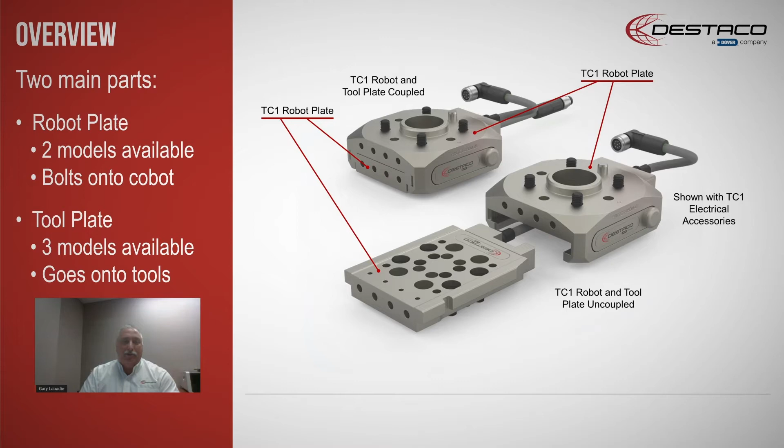So we came up with a tool changer, which basically consists of a robot plate and a tool plate. The robot plate is what bolts right onto your cobot, and the tool plate goes onto the tools. In listening to our customers, they asked us to create a plug and produce product, and that's exactly what we did.

The robot plate of the TC1 bolts directly onto your cobot arm. It's different from what others are offering in that it has the ISO 9409 mounting pattern. That means the user has no need to make an adapter plate. As a matter of fact, he doesn't need to look for bolts or hardware to mount the product, because we provide an integration kit with the product. So it's about 2 minutes to install the robot plate to your cobot arm.

Now on the tool plate side, your tools might have already been bolted directly to the cobot. So how do I make that work with the tool plate? Well, it turns out that the tool plate has the exact same mounting pattern, and we provide an integration kit for that. You can install your tools directly onto the tool plate, and then with a simple slide in and click, you'll lock and couple the tool changer together with your tools onto the cobot. So it's a very fast integration.

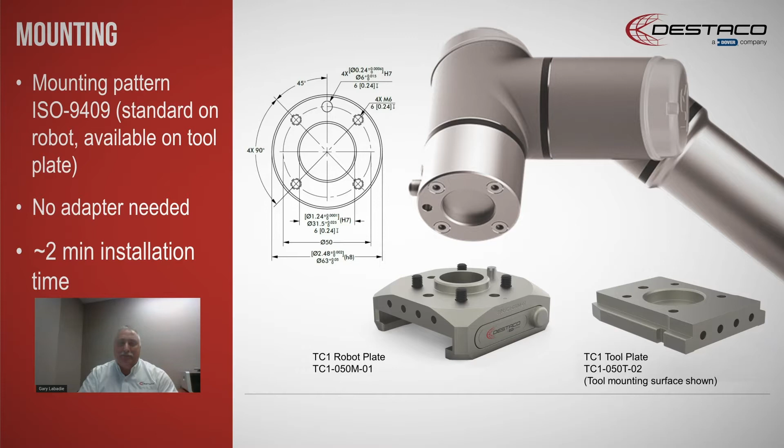The fact that we didn't ask you to create adapter plates means you've lowered your costs and increased your speed of integration. Adapter plates are what you find on a lot of other offerings in the market. Those are hidden costs that we want to remove from the user and make it a truly plug and produce product. So let's talk about some of the features of the tool changer.

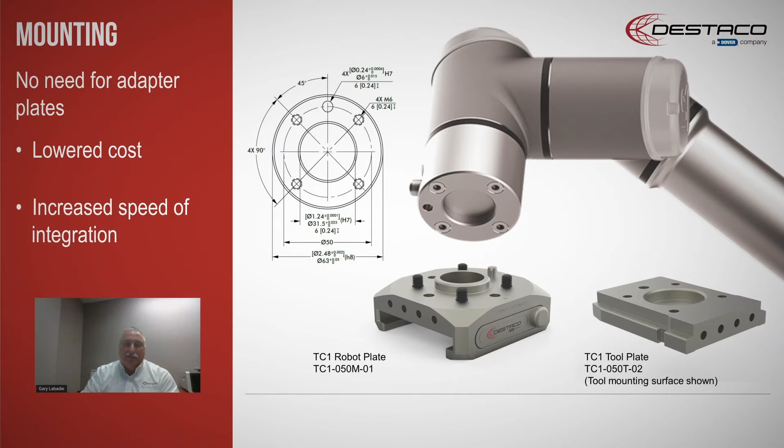First thing you notice about it is it's a very low profile product. It is 25 millimeters in height. That low profile will reduce any offsets in cobot programming required for longer tools that are added. Second, it's very lightweight. Cobots have a very low payload capacity, so the lighter the tool changer, the more payload capacity is applied to your physical tools that you need to use.

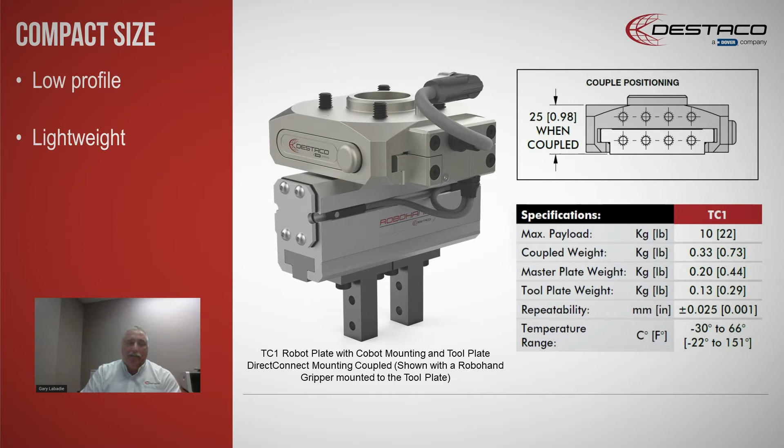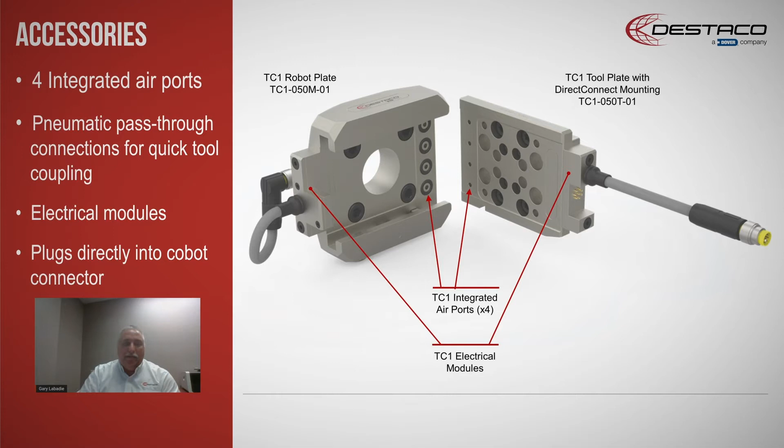Additionally, if we look at the features within the TC1 itself, the tool changer automatically comes with 4 integrated air ports. So if you're using a pneumatic application, the air lines are already there. Should you require electrical, we have electrical modules that plug directly into the cobot connector that's on the arm. That could be a Techman robot, a UR robot, or other robots—just need to check out the pinout compatibility. But the advantage is we do not require custom cabling or custom adapters. Again, that's added cost that shouldn't be necessary, and we solve that solution with the TC1.

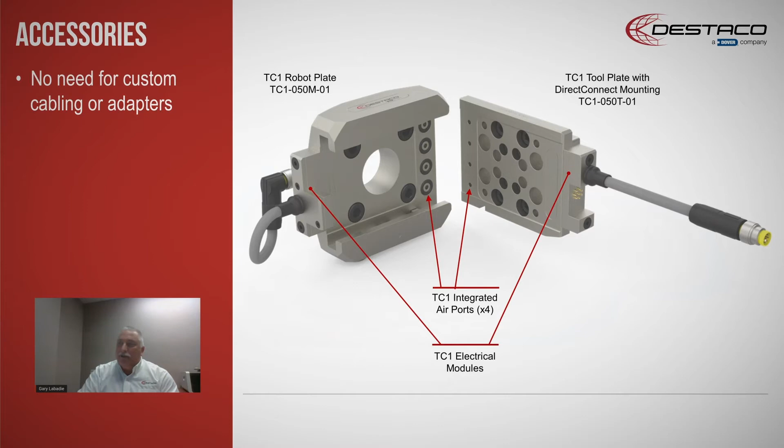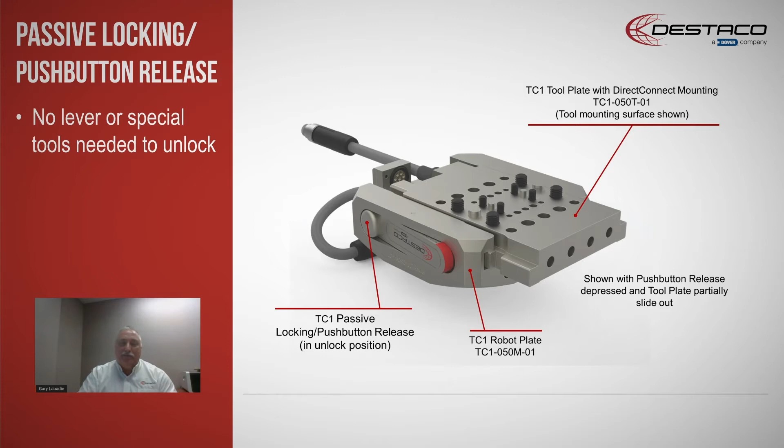So overall, you have a very simple self-locking mechanism. It's made to work for any operator. It's a low insertion force, simple push button locking or unlocking. Because it's just a simple push button, there's no lever that needs to be opened up, no tools necessary to unlock it, and nothing that gets in the way of other utilities, which is common with other solutions out there. So it's all inclusive. When you buy a TC1, you get everything you need to integrate it.

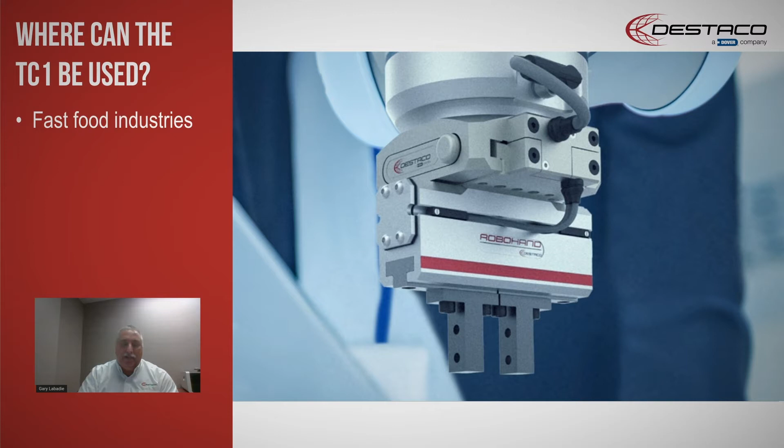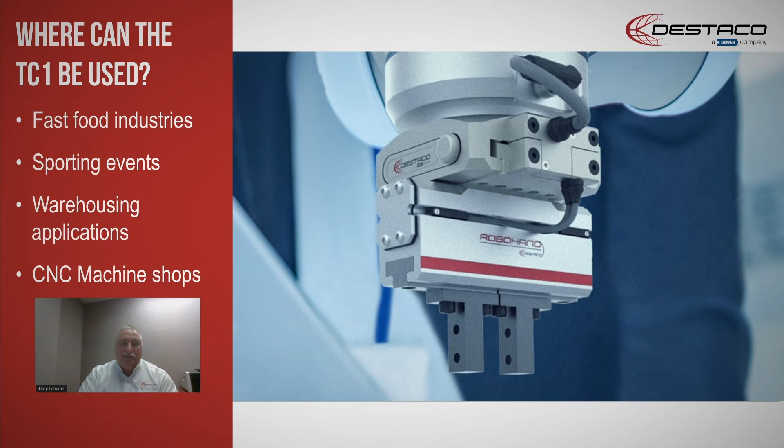And where are these applications that may be non-traditional automation? If we think about it, they're showing up in the fast food industries, at sporting events, in warehousing applications, and in small CNC machine shops that are trying to address labor shortages, safety issues, or integrating and automating their processes for better cost control.

So overall, the TC1 offers you a very cost-effective, flexible solution. It is a plug-and-produce product. It's the easiest tool changer to use on the market. It is customizable. I probably didn't cover that, but should you not have the mounting pattern, is not ISO 9409, the robot plate is fully customizable for the end user to put their own mounting pattern in it. That's one of the unique features this product offers. No other vendor supplies that, and the same is true on the tool side.

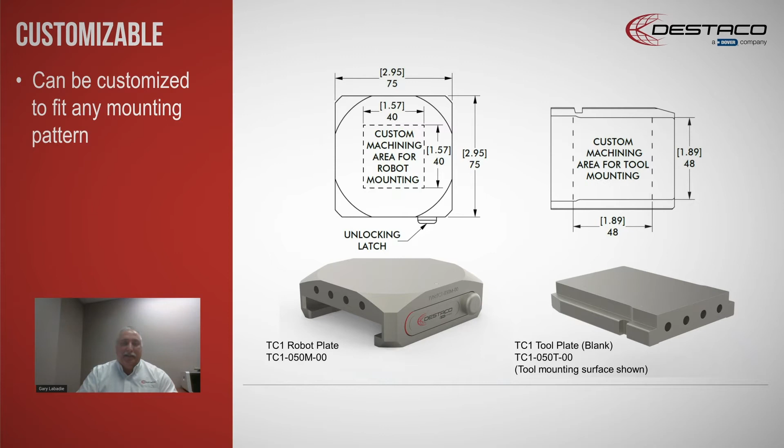So if you have to have custom mounting, you can either use a standard ISO 9409 robot plate to bolt to your cobot, and then a custom mounting pattern to your tools. It's very flexible in that area. And whether you do that or Destaco does it, it's your choice.

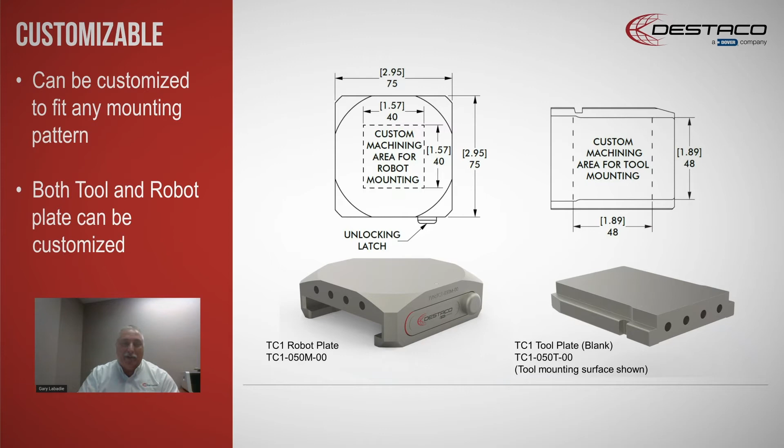Our goal is to give you easy to use tools, easy to install, and everything can be done in less than 10 minutes: 2 minutes for a module, 3 minutes for mounting the tools, and 3 minutes to mount it to the cobot.

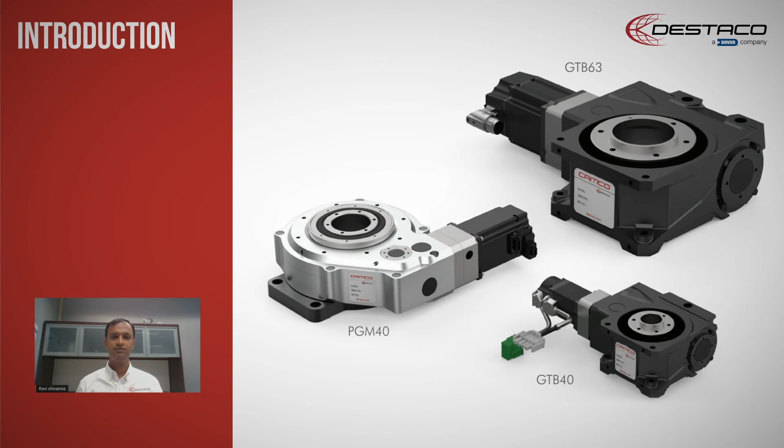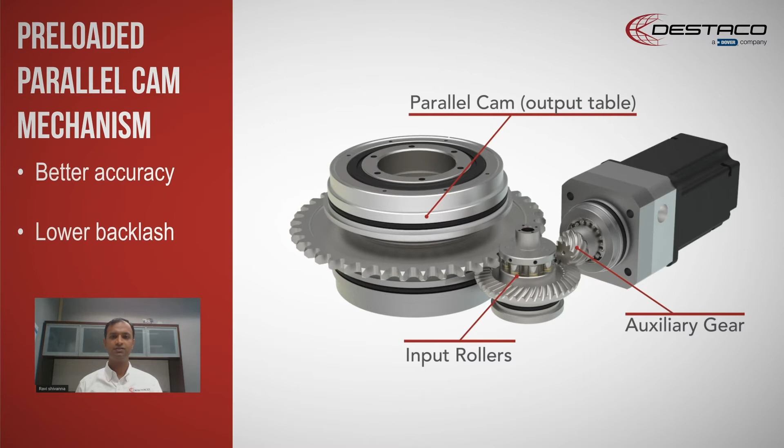Hi, my name is Ravi Shivanna, Global Engineering Manager for Destaco Camco products. Camco offers a wide variety of servo positioners. Today I am here to introduce PGM40, one of our new products within our Camco servo indexers family. PGM40 is a servo reducer with a preloaded parallel cam mechanism inside, giving better accuracy and lower backlash, suiting various precision or accurate servo indexing applications.

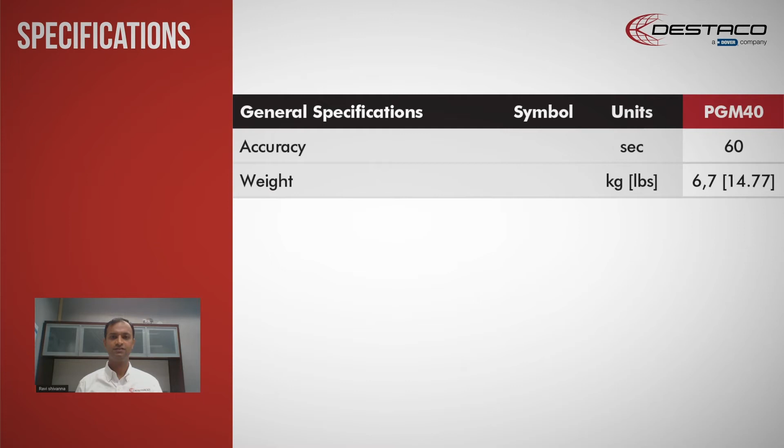This product has an accuracy of 60 seconds. It is light in weight, 6.7 kilograms, and its performance offers ease of use for a wide range of applications. This product has a mean output speed of 100 revolutions per minute and is able to deliver start or stop torque of 63.9 Newton meters. This product has an axial load of 1415 Newtons and a radial load of 2172 Newtons.

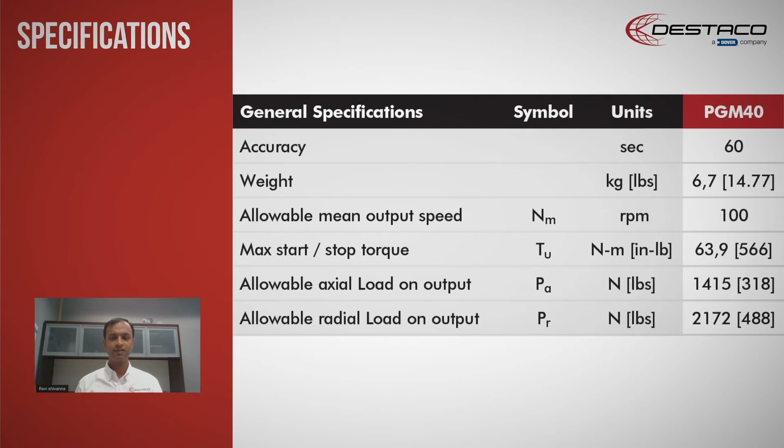This product has a moment load capacity of 102 Newton meters. Combination of smaller footprint, relatively higher speed, low input inertia, and smaller motor makes the product best fit for low load servo positioning applications, saving money and space for the customer, which would also lead to greater servo performance.

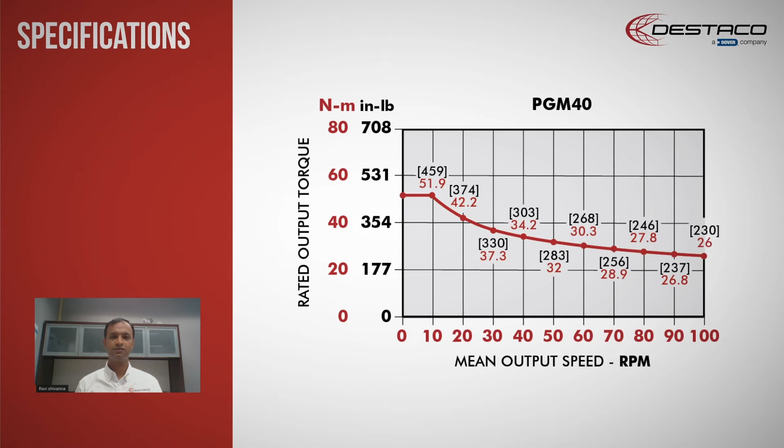Relatively, this product has a large through hole at the output and is suitable for wiring and piping. It has an integrated sealed taper roller bearing, which ensures there is no leakage and better torque transmission between internal mechanisms.

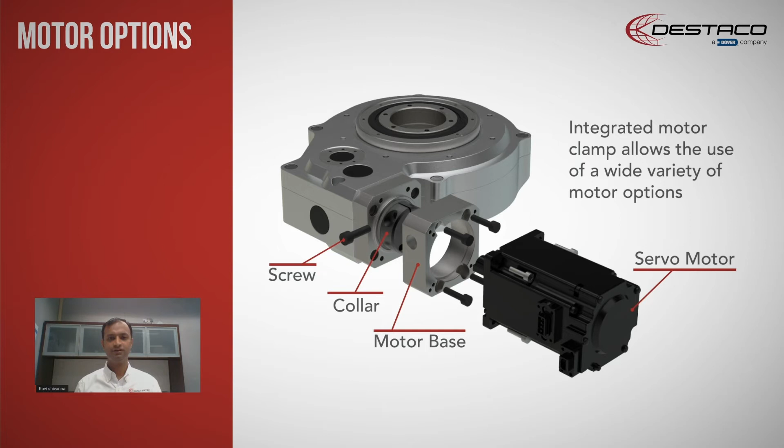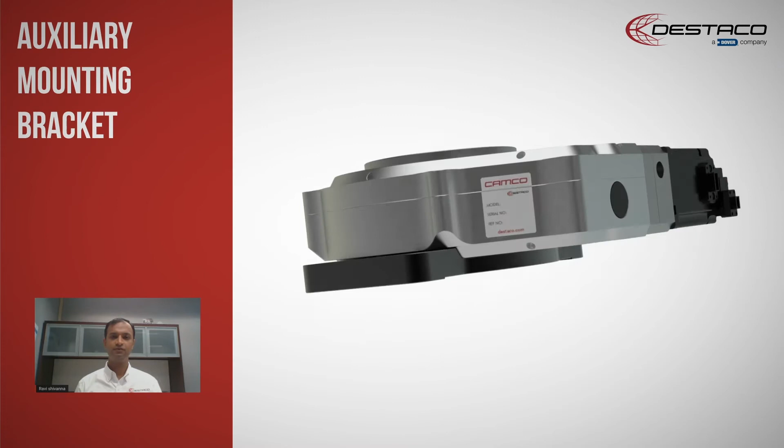This product can interface with a wide variety of servo motors. Motors can be easily mounted with an integrated clamp system, which ensures that various diameters of the shaft coming out from the motor are easily mounted onto the unit. High performance grease allows easy maintenance and can be oriented in all directions, that is horizontal, vertical, upside down, and trunnion mount. In addition, there is an optional mounting bracket to facilitate easy mounting onto fixture assemblies.

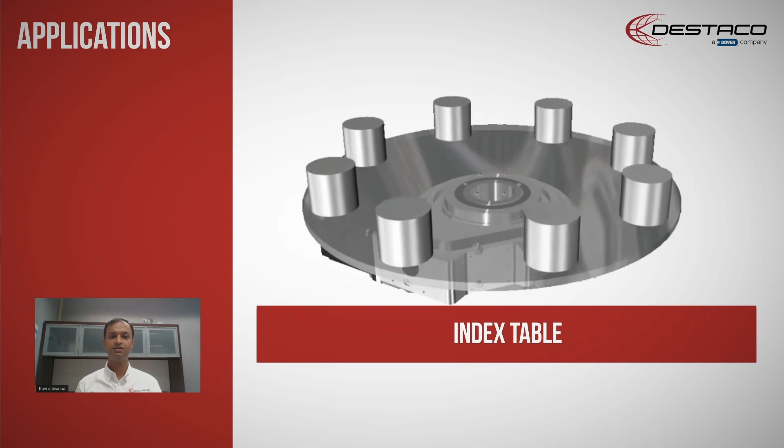This product can be used for various servo applications, which includes rotary positioning, machine tool, filling heads, inspection table, tilting positioners, and various other servo positioning applications. For more information regarding this product, visit destaco.com or contact one of our Destaco sales colleagues. Thank you.

Welcome everybody, my name is Gary Labadie. I'm the Global Product Director for Destaco of Indexers and Grippers. Today I wanted to cover a new solution for automotive press shop applications, primarily the 84N5 series universal sheet metal gripper, to address the two key challenges that any press shop faces year after year.

One of those challenges, the first one, is always productivity. The second one is lowering your cost. Everybody hears it, every manufacturer hears it. So the 84N5 was designed to support those two criteria. And it's part of a larger family of products based on the premise of four things required to allow you to increase your productivity and lower your cost.

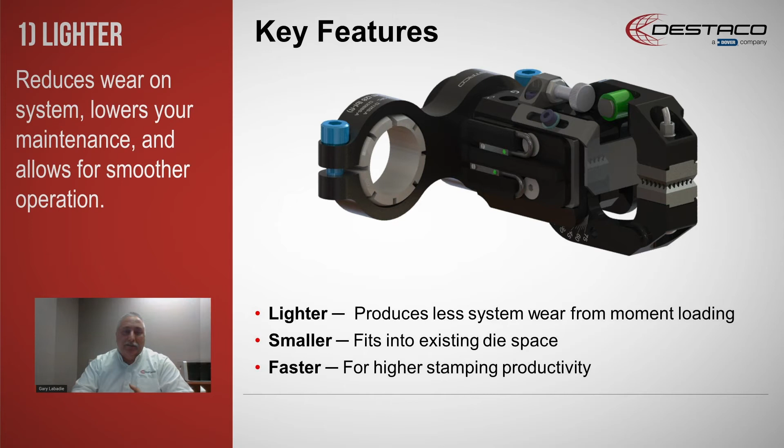And what are those four things? First, it's going to need to be lighter. Why does it need to be lighter? To reduce wear on the system, lower your maintenance, and reduce the moment loading forces so your system can operate with a little less vibration, a little bit smoother. Second, it needs to be smaller.

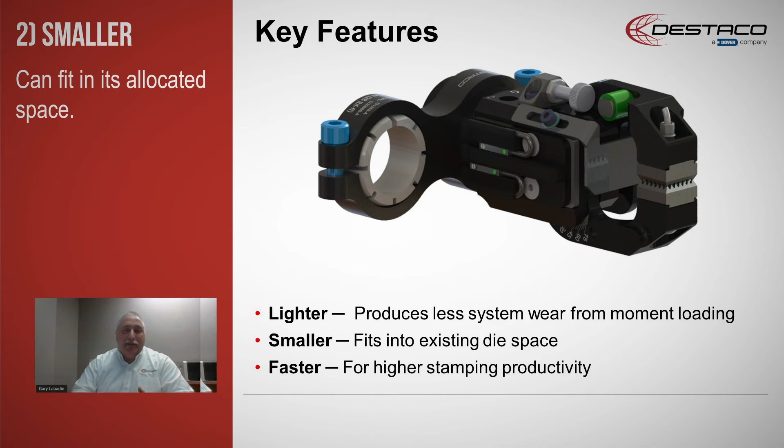If you're upgrading a system, the product's got to fit into the existing space you're already using for other sheet metal grippers, or it's designed to fit into any space allocated in the die for a gripper. Third, if you want to speed up your press shop, that actuator has to go faster. In our case, the 84N5 operates at 70 milliseconds actuation speed, that's 60% faster than the common actuators on the market today, which operate at 200 milliseconds. So by default, having lighter, faster, and smaller, we meet some key criteria.

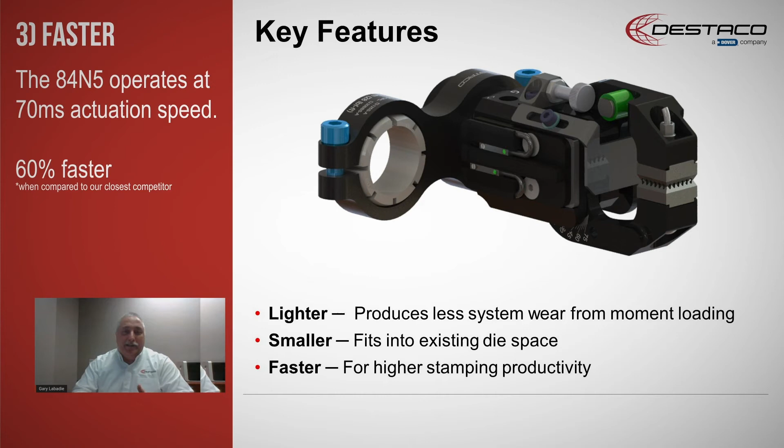Now, the big one is increasing your productivity, and the biggest one is lowering your cost. Now, it has to be adaptable.

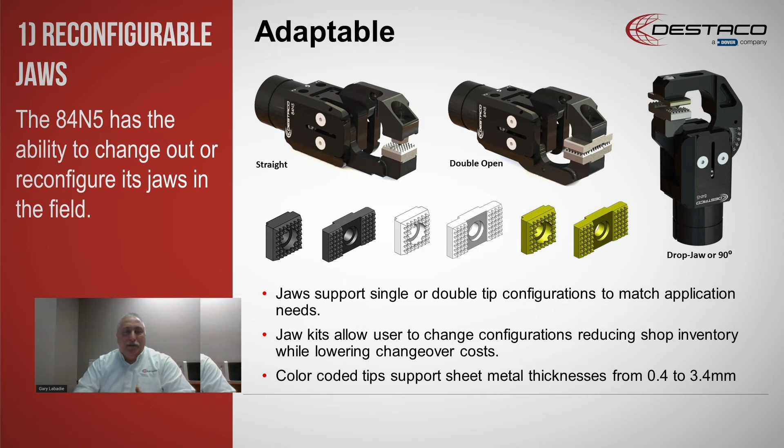The 84N5 is fully adaptable in that you can change out or reconfigure the jaws. Whether you need a straight jaw, double open jaw, drop jaws, or 90-degree jaws, it's a matter of unbolting a couple of screws, pulling the jaws out, and putting the new jaw configuration in place. Destaco offers jaw kits for different configurations, so it doesn't have to be done at the factory, it can be done in the field. It becomes the user's choice, giving you jaw configuration flexibility.

The second one is the tips. A lot of products out there require you to buy jaws that are either single tip design or double tip design. In the case of Destaco's 84N5, the same jaws support either one. Whether you need a single tip, you just order the tips, or whether you need the double tip, you order the double tip versions. Then you can install them yourself in the field or change them out. They're a wear item regardless, so we offer a wide variety of tips.

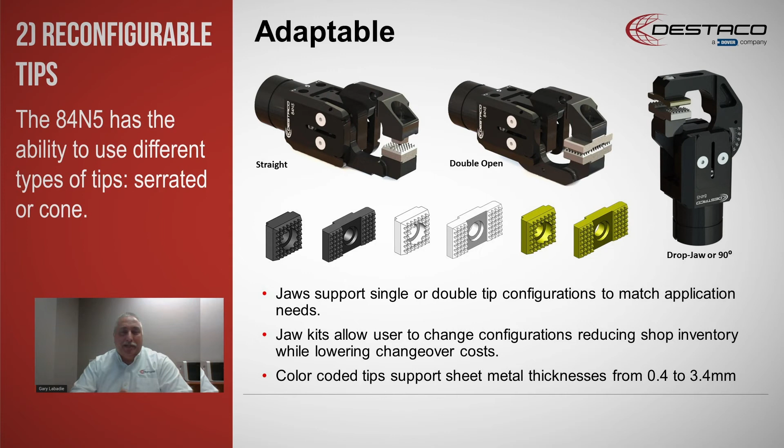The third thing that makes it more flexible: if you look at your inventory today, you probably have grippers with a 30-degree opening angle, 75-degree, 45-degree, maybe even 60-degree. The 84N5 is fully adjustable anywhere from 15 to 75 degrees. Simply loosen a little bolt, make the adjustment, look at the indicator on the side of the gripper, and it will tell you specifically what opening angle you're operating at. Does that have to be purchased at the plant in the beginning?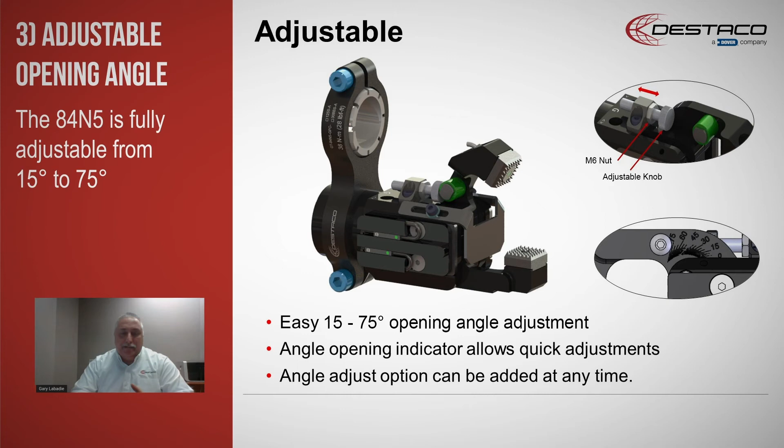No, it's actually field retrofittable. So whether you order with the adjustment option or without, that's your choice. Maybe you order the gripper without because you want to save some money, then find out you need it later, so you can just order it and add it yourself in the field. That gives you a lot of flexibility: opening angle, tip adjustments, jaw reconfigurations, and finally, what about the sensing solution?

A sheet metal gripper needs to know if it's got part presence or a blank within the jaws. The control system needs to know that, so we have an in-tip sensor. It doesn't change the size of the tip like other products I see on the market. The same tip size supports whether it has a sensor in the tip or not, so we're not changing any size requirements. That gives you true blank detection.

Then we have side sensing, dual side sensing, so we can detect anywhere in the jaw movement for systems that require a zero blank, a double blank, full open, full closed type sensing. The customer can adjust that anywhere they want, anywhere in between. It's up to them, fully flexible in the sensing arena.

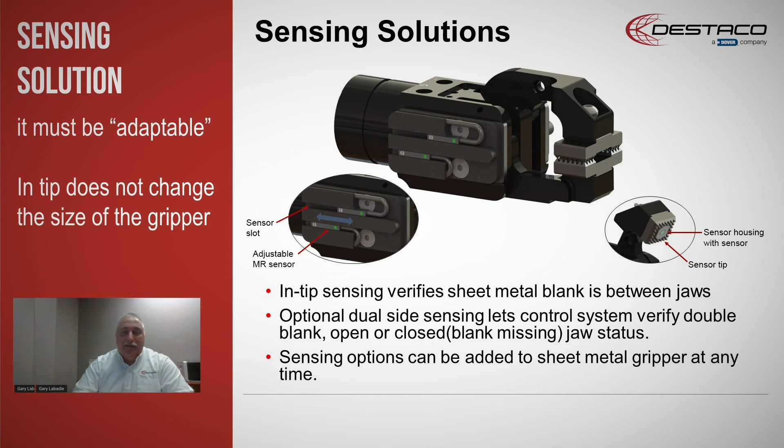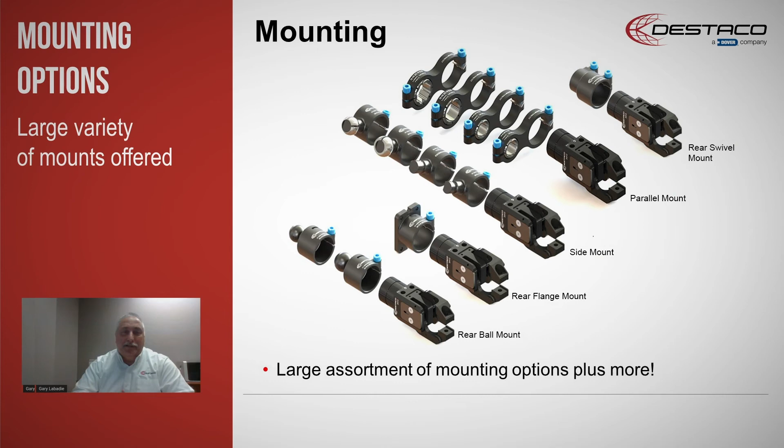Finally, what good is a gripper if it can't adapt to the existing system you have? Destaco offers a vast variety of mounting options that slip onto the back of the gripper, whether you need a rear flange mount, a rear ball mount, an apple core mount, or an offset mount, we have all those kinds of mounts, and we can make custom mounts as well to retrofit into an existing system. So that's a brief overview of the 84N5.

Remember how I started: the two things you're tasked with every year are increasing your productivity and decreasing your cost. By having a gripper that is faster, lighter, smaller, and adaptable, it meets the criteria you're faced with. It'll lower your inventory, give you the advantage to make more parts per hour, and help you meet your goals for the year and stay competitive.

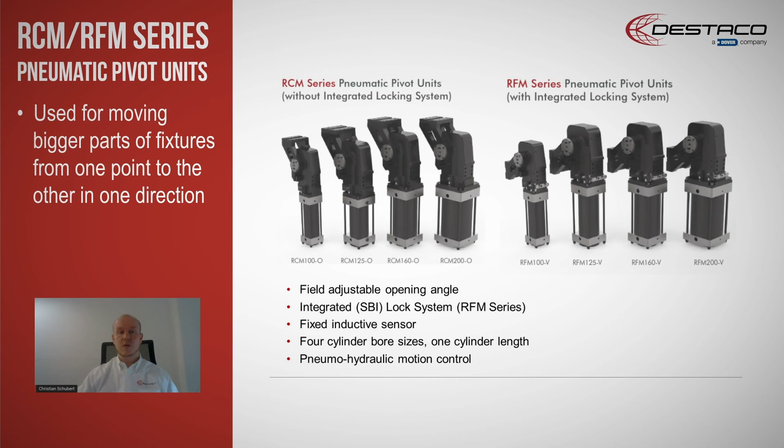Coming up to the main features or benefits for the unit, starting with the biggest point: to give more flexibility than before. We integrated into the unit an open angle adjustment, which reduces the level of spare parts you need for your different applications. Before, if you wanted to adjust the unit, you needed to have different lengths of cylinders, which implements a lot of spare parts for your different applications.

By integrating an opening angle adjustment, we have reduced the parts of cylinders you need down to one cylinder. This is a huge benefit on the spare part level for this unit and gives you the best possible flexibility. You can decide yourself if you want to have the unit pre-adjusted to the angle you want from our side, or do it directly in your plant or work environment by yourself. So it's up to you how to use it and implement the new benefit for the unit.

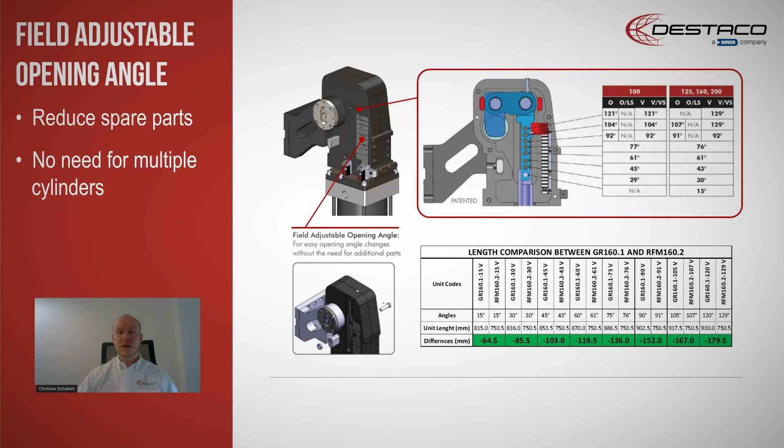The next thing is in the area of safety. These units normally move big loads and big fixtures from one point to the other. In safety matters, if the energy is gone, in this case the air, the unit needs to hold the position of the fixture, and the worker can go into the production to remove the issue in the field. It's essential that the worker is not damaged by a falling part or fixture.

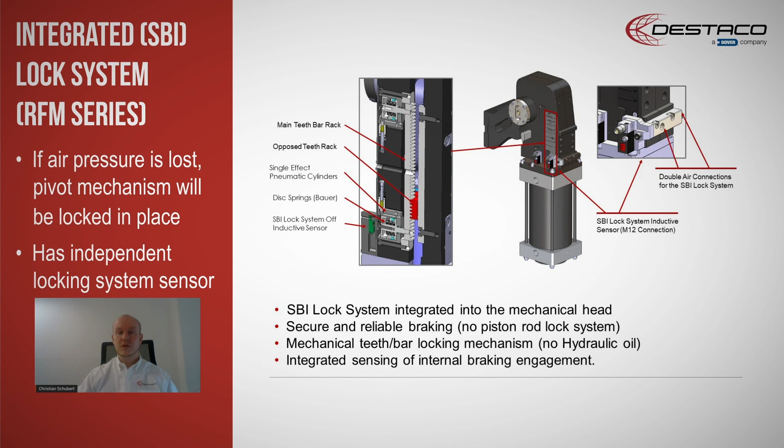So what we integrated here is a safety brake system included in the head, which gives you the best possible safety for your application. You can also have it detected by a sensing system included in the unit. Normally you have a sensor for the open and closed position of the unit. This is added now to have the information of when the unit is locked and when it is not locked.

The next thing is about the sensors. Before, as I explained, we had the feature with different lengths of cylinders to get the right angles for your application. By implementing the open angle adjustment, you now only need one sensor, which is a big improvement on spare parts, where you only need one sensor in stock and not different sensors to adjust.

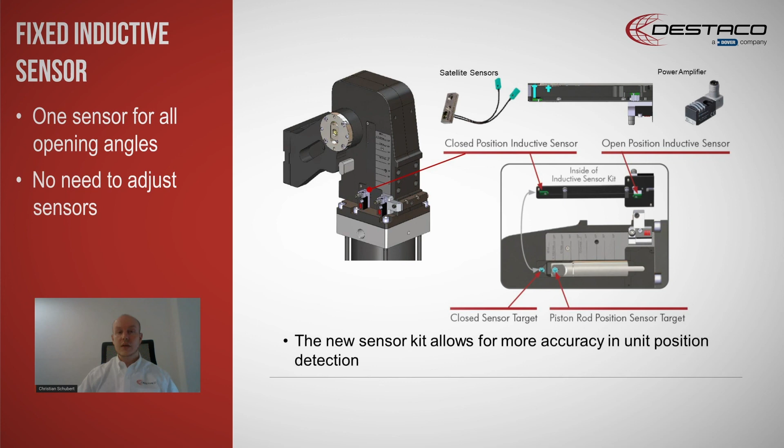The last thing I want to cover today is having a smooth transition. As I explained, we're moving a lot of load and weight with bigger fixtures. With a bigger cylinder moving a heavily loaded fixture from one point to the other, you need a smooth transition into the end position where you want to have your fixture or parts mounted on the unit.

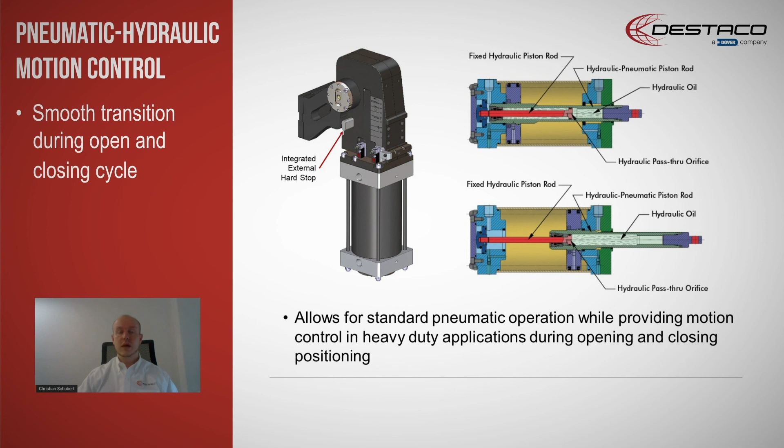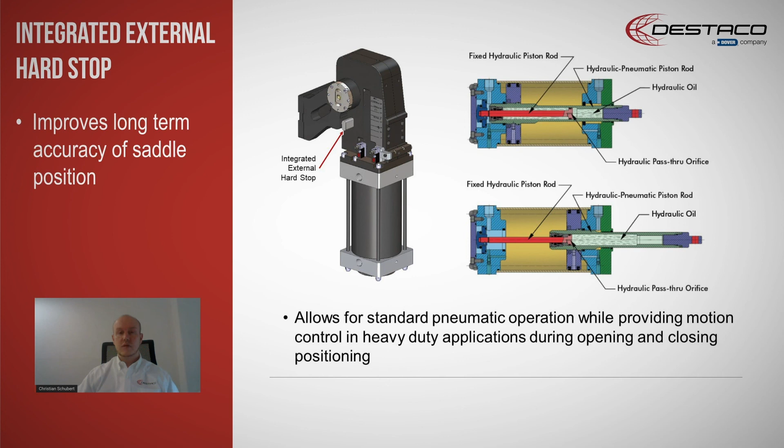Therefore, there is an integrated hydraulic system in the pneumatic cylinders, which allows a really smooth transition of the maximum load mounted on the arms to your end position. Additionally, to have much more accuracy, we included an external stop outside of the head. This improves the position of the unit over its lifetime, and together these give a good combination of smooth transition and much more accuracy than before.